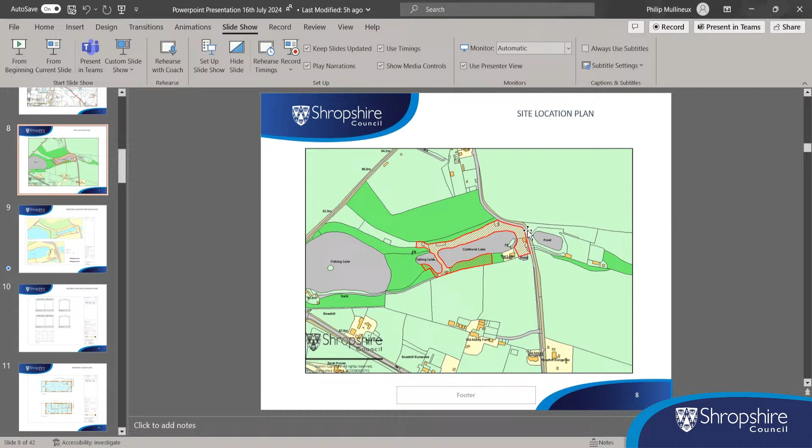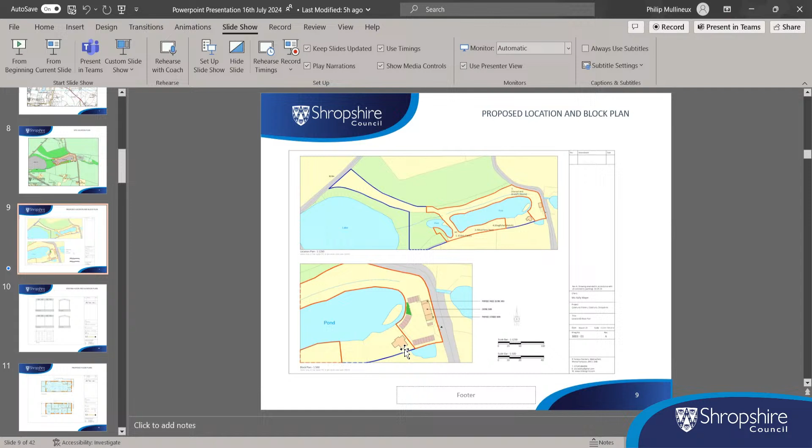Next slide, please. The bottom diagram of the two images is a detailed site layout plan showing the dwelling existing on site, which is a rural worker's dwelling. Access is to the eastern boundary in the bottom right hand corner, with the building located on the eastern boundary next to the road.

This is the proposed internal layout. The bottom image is the ground floor showing a 2-bedroom accessible holiday let. There's an external staircase that wraps around the back corner with an outside lift also to provide disabled access to the first floor, with the first floor predominantly being the tea room with a small balcony, kitchen and an office.

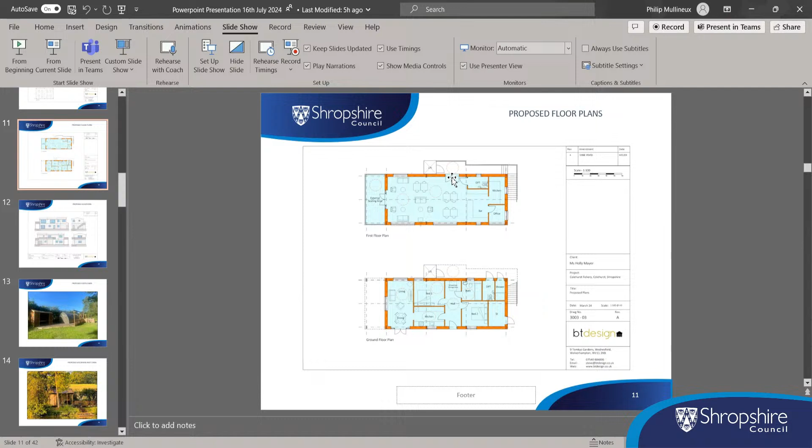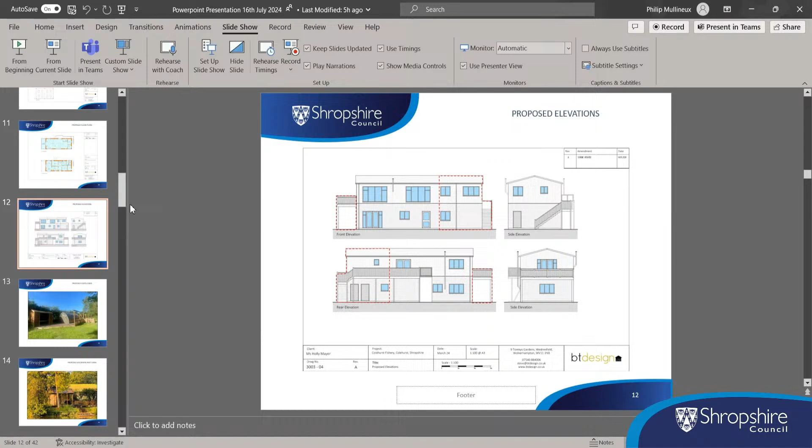Next image, please. This is the external appearance of the proposed building, which will be brick clad on the lower ground floor level with timber cladding above. The red hatched areas indicate the proposed extension to the building, including the staircase to the side and to the rear. It equates to approximately a 50% increase over the existing size of the building.

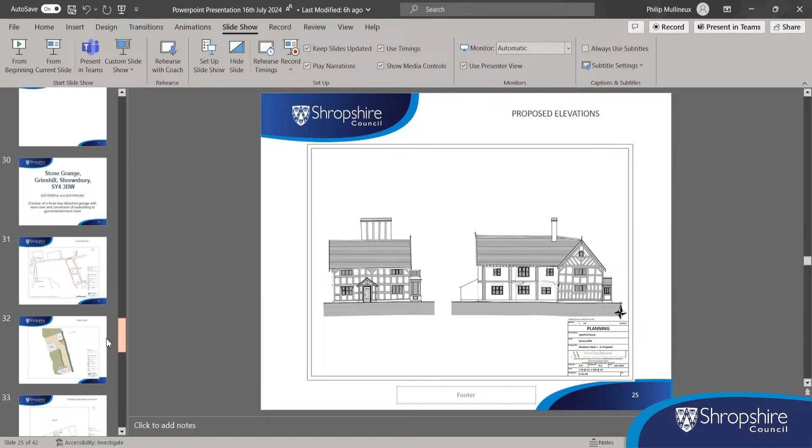Nick? Thank you, Chair. I feel qualified to speak on this one because I live in a black and white house very similar to that, although mine is painted black and white. The porch as it stands, could we have a picture up please of the existing porch? And from what I know of buildings of this sort of age, and a lot of research I've done into my house, that porch is totally out of keeping with the building. You would not have a nice old timbered house and then put narrow struts like that at the front of the porch.

I think the new one, although we haven't seen a picture of what it's going to be, is sure to be better. And I propose going with the officer's recommendation, subject to the conditions set out in Appendix 1.

Thank you, Julian, I think you proposed to start with. Did you? Well, I'll second that. I second that, job done. Any more comments? Going straight to vote, I think we can have a show of hands on this one. All those in favour? Unanimous. Thank you very much.

Moving on to item 7. So, Jane.

This application concerns another listed building, but this is a grade 2 star listed building, Stone Grange, Grinshill, and we've got 2 applications before you for the erection of a 3-bay garage with a room over and conversion of an outbuilding to a gym and entertainment room. Now, the listed building consent and the planning applications have the same drawings, so we'll deal with the slides as one, but at the end, when you come to decide on the applications, you'll have to do 2 separate votes.

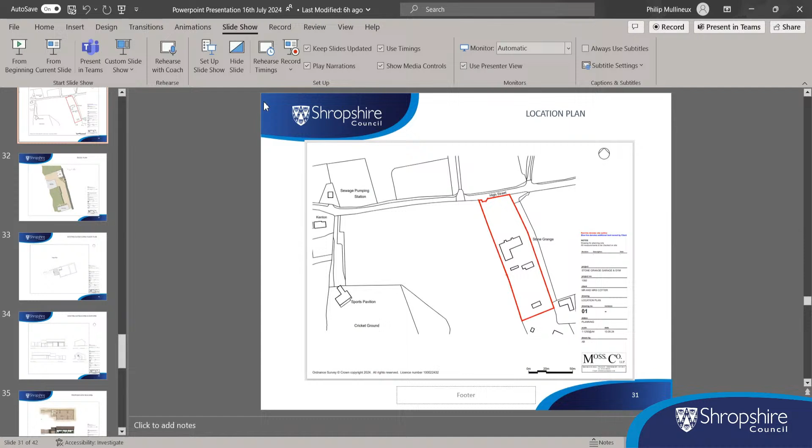So the high street runs to the frontage. Next slide please. This shows the relationship - we've only got partial footprint of the existing dwelling, but to the rear is the outbuilding proposed for conversion. That's the existing garaging and garden store at the moment, to be converted to the gym and entertainment space. And then to the frontage we've got the 3-bay garage with the room over.

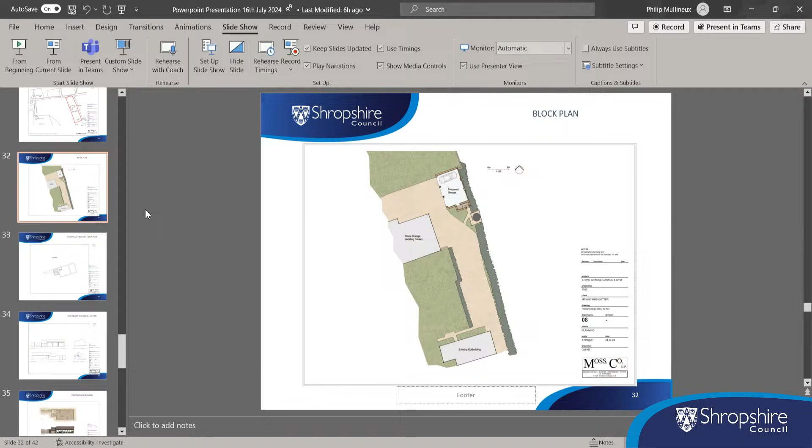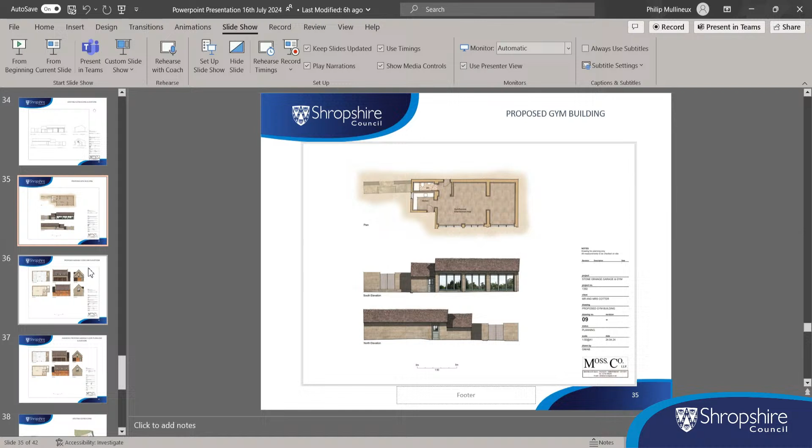This is the proposed garage with room over as originally proposed. We have had objections from both Historic England and the Council's Conservation Officer to that plan. So in response, the agent has submitted amended plans. Next slide please. Removing the dormers and reducing the height - the height's reduced by about 300 mil and the gable parapets by 500 mil.

The accommodation to be provided is a 3-bay garage, ground floor, with an external stair, and then over - what is said on the plans is a home office with a kitchenette and a separate shower room. What is said in the design and access statement is staff accommodation. So in the description of development it's just termed accommodation over, covering both areas.

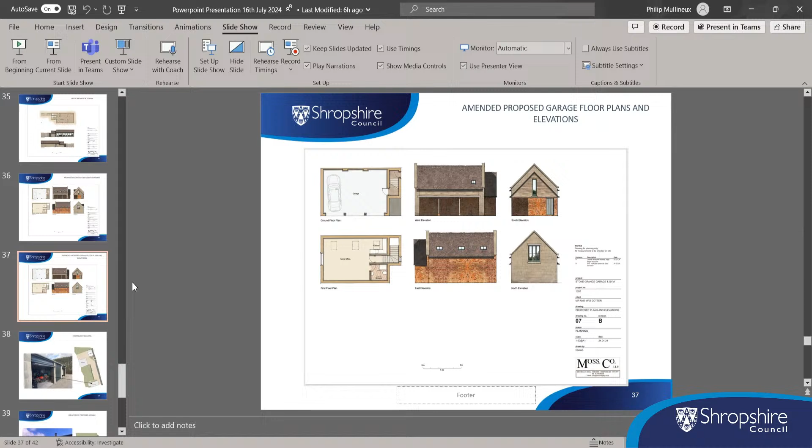Thank you, Jane. Okay, we have one speaker, the agent, Graham Moss. Would you like to come forward, please? Now, in this case, committee, because you've got two applications on for the same, Graham, you can have six minutes if needed. I don't need six minutes, I'm actually speaking for both. This application has been supported by the parish council, which is significant as they were the only consultee who actually visited the site and therefore, in my view, hold the most authoritative viewpoint.

The response from the local authority and Historic England appeared to be primarily generic, and when revised drawings were submitted, no mention was made of the substantial reduction in scale. The height of the building came down 0.5 metre, and we mentioned that, but nobody else has.

As there are traditional outbuildings to the rear of the property, it would be impossible to relocate this proposal with any advantage. However, the implication made by the local authority is this modest building would spoil views from the northeast, and it's simply not true, as it would be all but invisible, as I hope those photographs have made clear from the road - you don't see a thing. We've also worked very hard, as the parish council acknowledged, to provide a building that would be entirely sympathetic to the main house, using the verge parapets and other details.

Now, I appreciate some comment has been made about the brick on the rear of the building. That is because it's built into a dense hedge, and I saw no point in using dressed ashlar sandstone when it was facing into a hedge. I hope you've done a site visit today. I could have prepared a photo montage, but as it would show nothing, it seemed hardly relevant at the time.